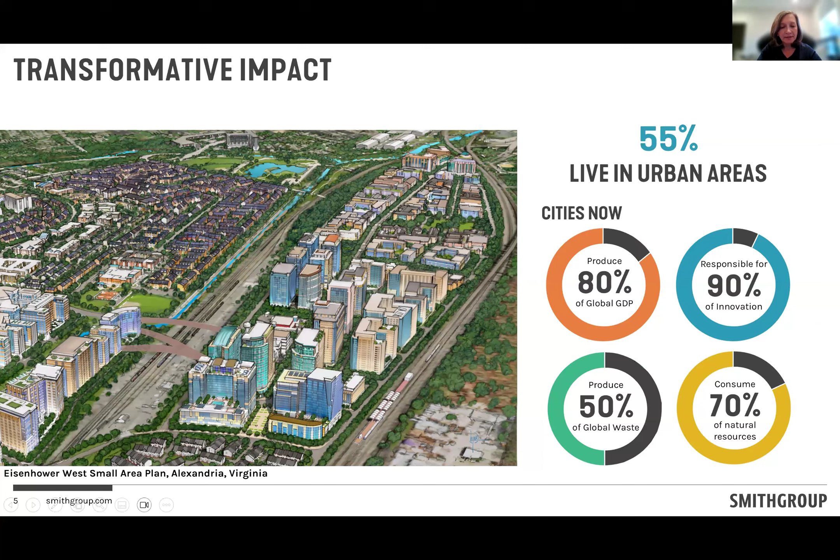And that's where urban design comes in. Urban design's impact can be truly transformative. How we plan and design our cities, our towns, and our spaces matters to our present and to our future. After all, 55% of people now live in urban areas, and our cities are responsible for 80% of the global GDP, but also 50% of the waste, 70% of the natural resources, and 90% of the innovation. And the innovation is key, because that's how we can make changes that address these issues.

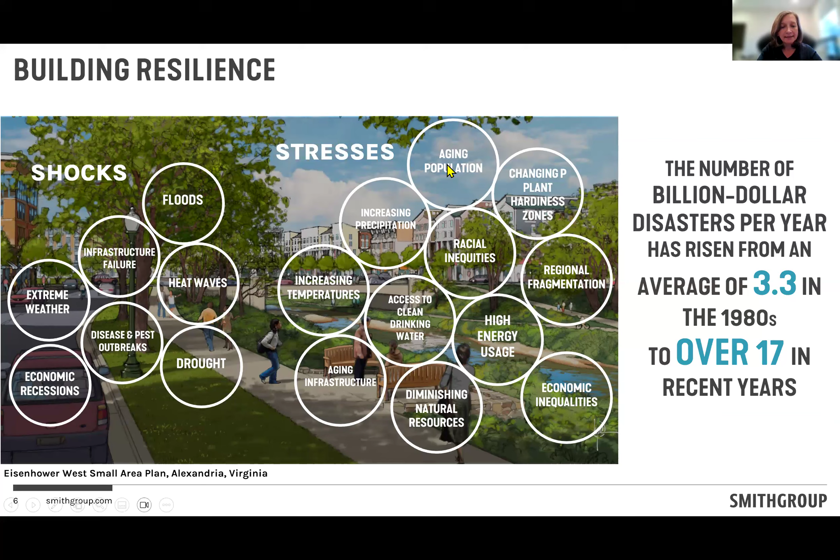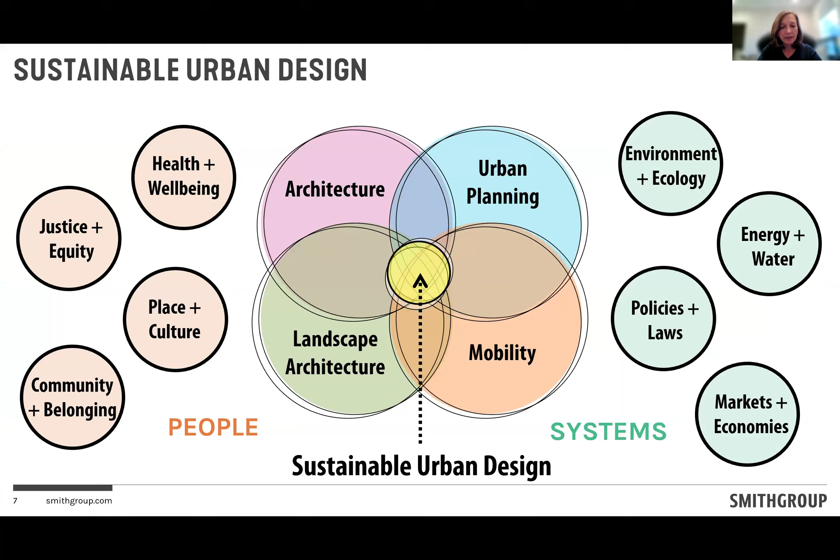At the same time, climate change, government policies, and world events have created shocks and stresses on our people and our systems that are testing our resilience and pushing us to find strategies for adaptation and mitigation. Sustainable urban design lies at this intersection — several disciplines coming together concerned with design of the built environment, and therefore affecting people every single day in every aspect of their lives. But more than that, sustainable urban design can really bring together the beauty and complexity of people with the systems that underlie our communities in a very meaningful way.

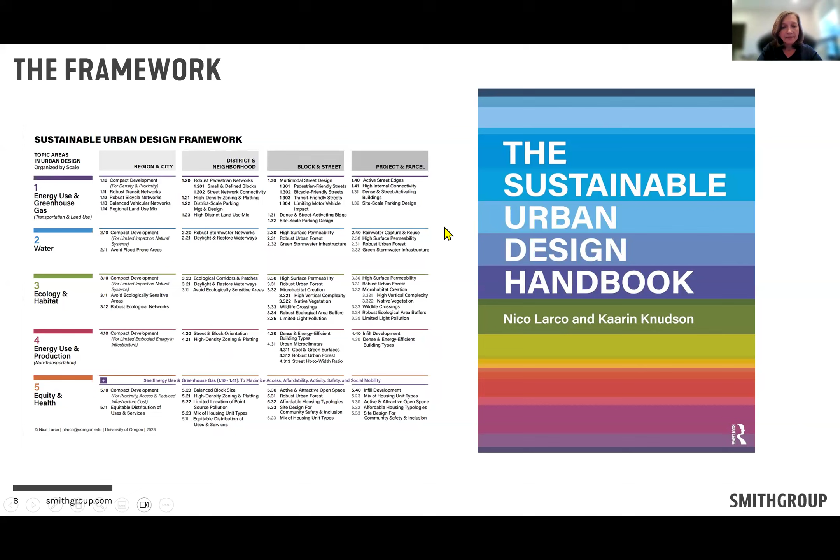The Sustainable Urban Design Handbook brings together critical sustainability topics with design at every scale that we work in. It's an amazing resource that synthesizes research and examples and presents them in a way that is easily accessible and applicable by professionals. So without further ado, I'll introduce Nico Larco.

He's a professor, urban designer, an architect, and he leads Element Urban Design, a design and consulting firm, and has been professor of architecture and urban design at the University of Oregon since 2004, where he's also the director of the Urbanism Next Center and co-director of the Sustainable Cities Institute. Since 2018, he has also been a strategic advisor and researcher at TNO, a Dutch national think tank. Professor Larco researches and teaches sustainable urban design, has developed the framework that you're going to hear about, and assists cities and projects on how to best apply these principles and approaches. His work around Urbanism Next is focused on how technology advances issues such as shared mobility, self-driving cars, e-commerce, and the sharing economy. Professor Larco has published in various academic and professional journals, was a Fulbright Scholar twice, and has testified on his research to Congress, and was also a speaker at TEDx College Park.

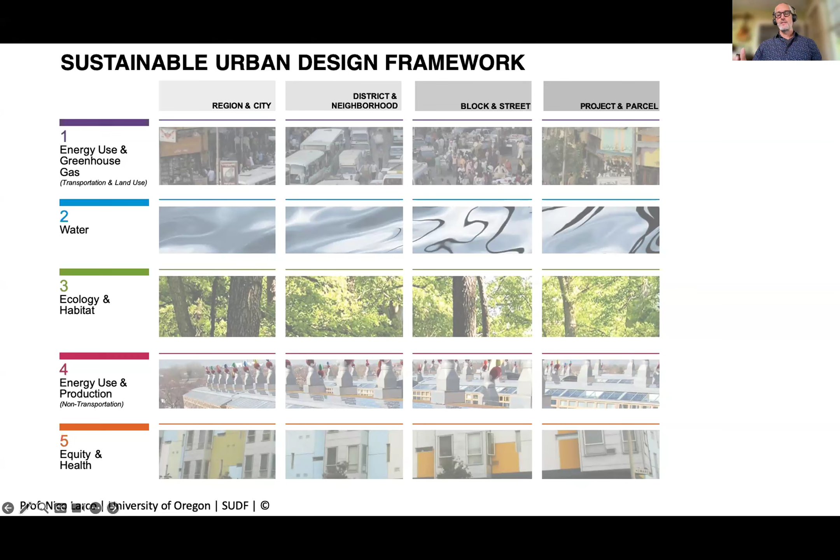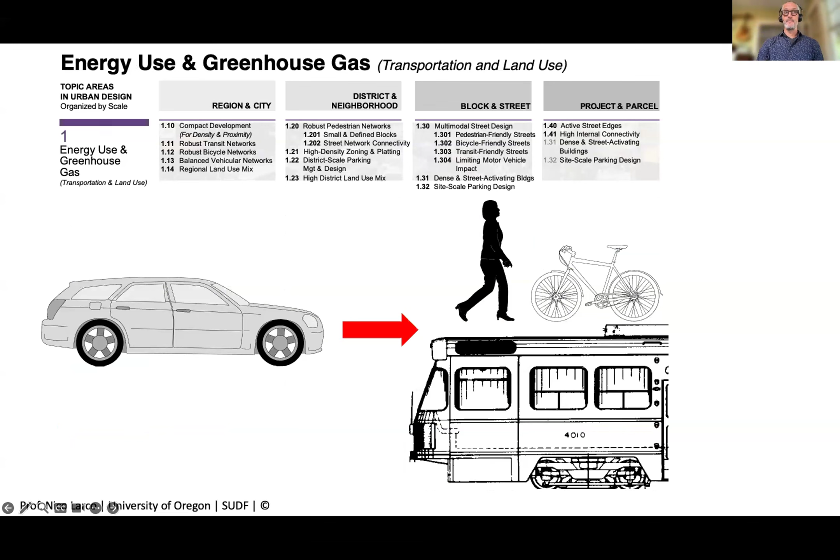So at the largest scale, the region and city scale, the first absolute rule is compact development. And this is important for all the different topics we're going to be talking about. Compact development limits our metropolitan footprint, limits sprawl, lets things be closer to each other, and has a tendency to lead to increased density so there are more opportunities for origins and destinations to be close to each other.

There's lots of different ways of doing that. Here on the lower right, you see the urban growth boundaries that exist around cities in Oregon, but there's lots of different ways to make sure you get compact development: green belts, transfer of development rights, all sorts of things.

We can also think about things at this scale, such as our transit network, the overall network across the entire metropolitan region — not necessarily how a stop is working, but what the opportunities are to get from one place to another. We can ask the same kind of question for the bicycle network, how that works across the entire region — is it possible to get from one area to another as an entire system?

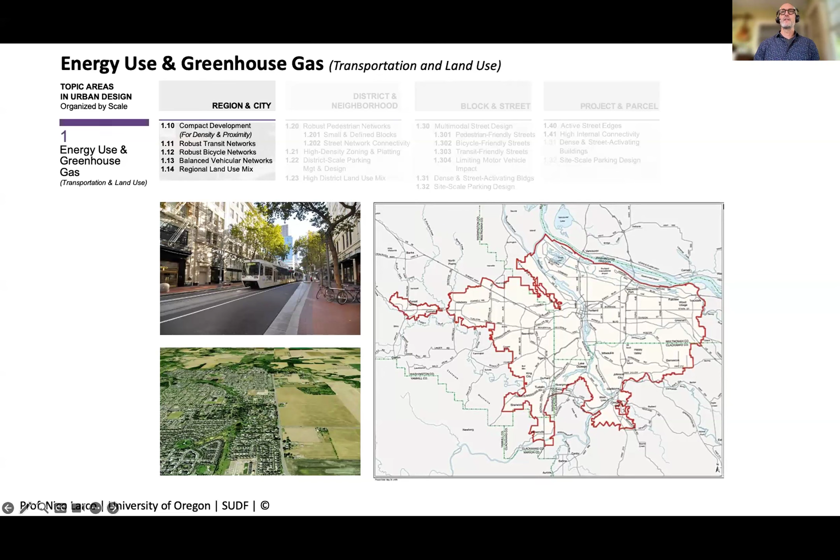And then we can also think about things like the regional land use mix. Do we have all of our housing, for instance, in one area, and all of our commercial in a different area, and all of our industrial in a different area? Or are we having more of a mix of those types of things?

At the district and neighborhood scale, there's a number of things we can look at. On the one hand, simply a question of how are we doing in creating a robust pedestrian network? And a lot of this has to do with street network connectivity. So if we look at this example on the left, this is actually Portland, where I'm from.

This is a 200 by 200 foot block, some of the smallest blocks in the United States. And on the right is a suburban area in the United States. What you see here is these small and defined blocks let us very easily get from one part of the city to another in a fairly easy, straightforward, and straight line manner. It's very clear how to get there, and it's also fairly direct.

In a more suburban area with these loops and lollipops patterns, let's say I lived right here and I wanted to go to this house over here. The straight line distance is not very far at all and absolutely walkable. But what happens is I actually need to go through the street network around here, out to here, potentially onto an arterial, back over, and then down to get to that thing. So that is doubling or tripling the length of the trip, which is why we tell our kids to get in the car and we'll take them there.

So the street connectivity and the way that impacts the travel distance has a big impact on what mode we're going to take. Other things at this scale are, for instance, the density of zoning and platting.

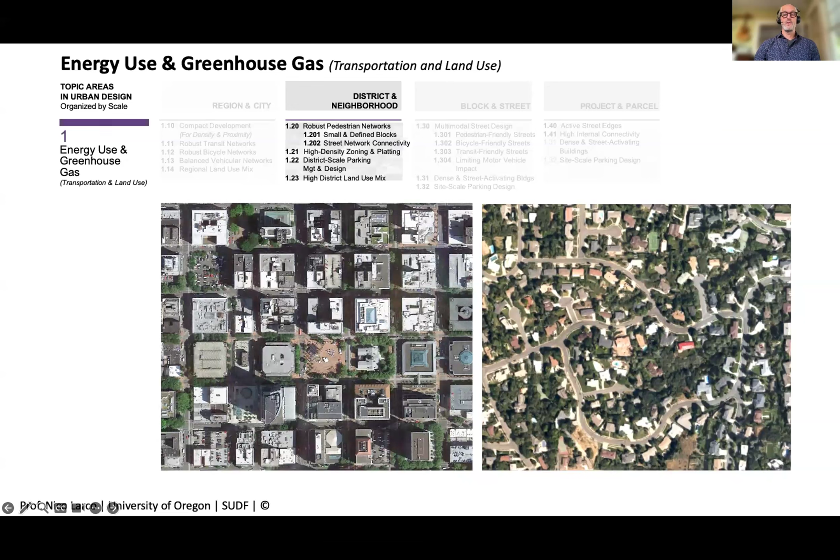At the block and street scale, we're talking about things like complete streets—multimodal street design, streets that don't necessarily exclude the car, but have the car fit within a bunch of different modes that all have a presence and ability to be there and feel comfortable. This is an image from NACTO, and the Urban Street Design Guide is a fantastic resource. We actually worked with NACTO on some of this research earlier on in developing the book. Here you can see fantastic pedestrian areas, bike infrastructure that feels protected and safe, dedicated transit lanes, and vehicles are also allowed, but they're not necessarily allowed to dominate.

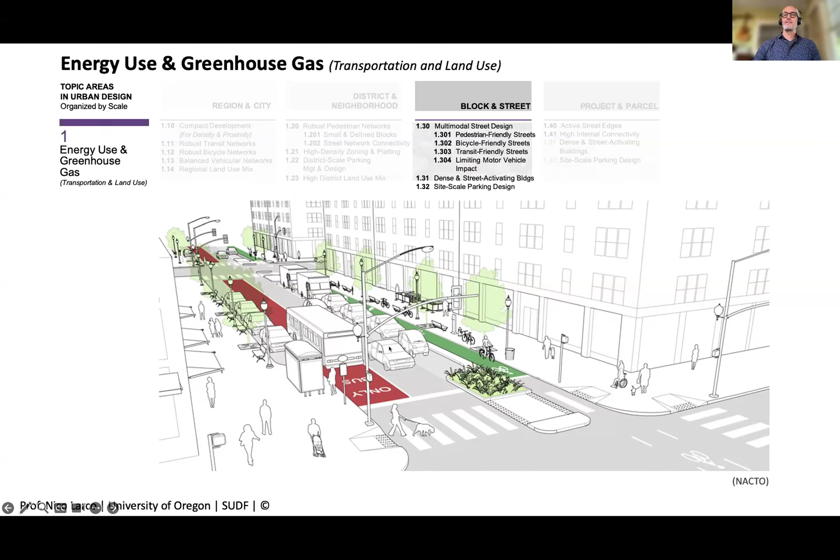Also at this scale, you can think about parking—not only the amount you have, but how you actually design it. At the block and street level, we're really interested in the design of the parking. Questions like: what is the edge condition of the parking? Does it feel like a big gap in the urban fabric? Is the parking located in front of the building or behind it? Is it located on a corner or within the block so you start to feel more continuous street front? What size are the curb cuts?

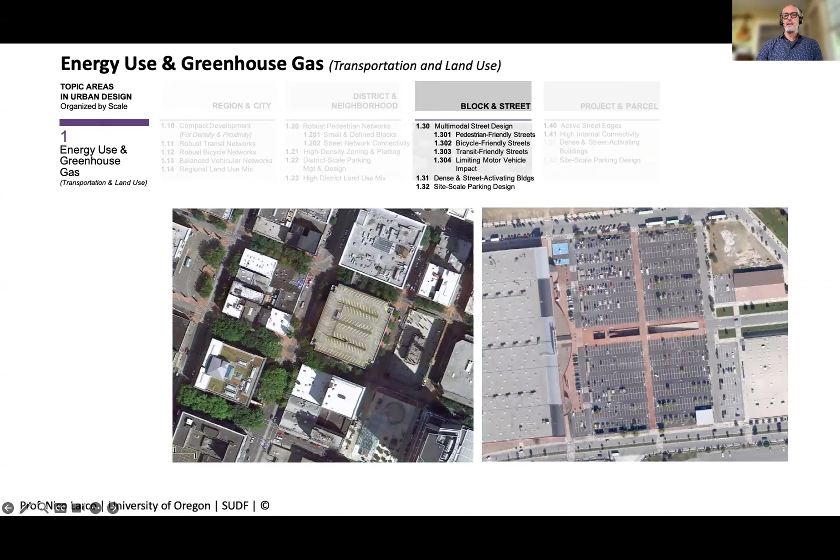Those types of questions. And then at the building scale, we really start to think about how the building is contributing to sustainability of the urban built environment. The image on the left shows high density housing—you see the tower in the back, and the building in the foreground is part of that same project. Instead of having those units all accessed internally through a corridor, which is typically how we do this, each one of these units actually touches the ground and has an entrance and windows looking out. That creates a fantastic, vibrant street front, even when no one is specifically coming in and out of the buildings.

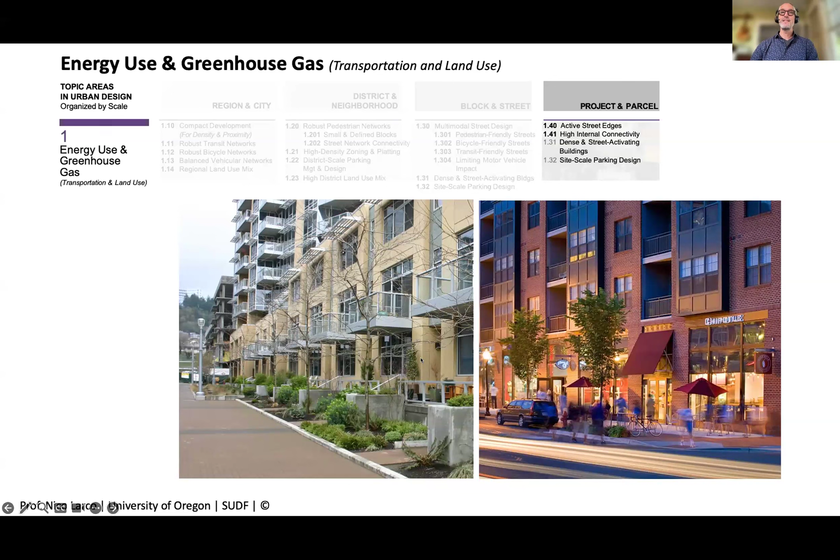This is very much the Jane Jacobs 'eyes on the street' concept, or the perception of eyes on the street. Think about how different that would feel if this was all the backs of buildings with no entrances here.

In a commercial environment you can think of a similar thing: the amount of transparency, the number of windows and doors and entrances, helps create a lively environment. Picture if this was just a continuous solid brick wall with the rest of the urban environment the same, how much that would diminish the desire to come here, walk, bike, and use other modes of transportation.

So that gives you a sense across all these different scales of how that works in energy use and greenhouse gas. I'm going to go a little faster through some of these other topics.

In terms of water and stormwater, there are two main things we want to do: on one hand minimize the amount of runoff we have, and on the other hand mitigate the runoff.

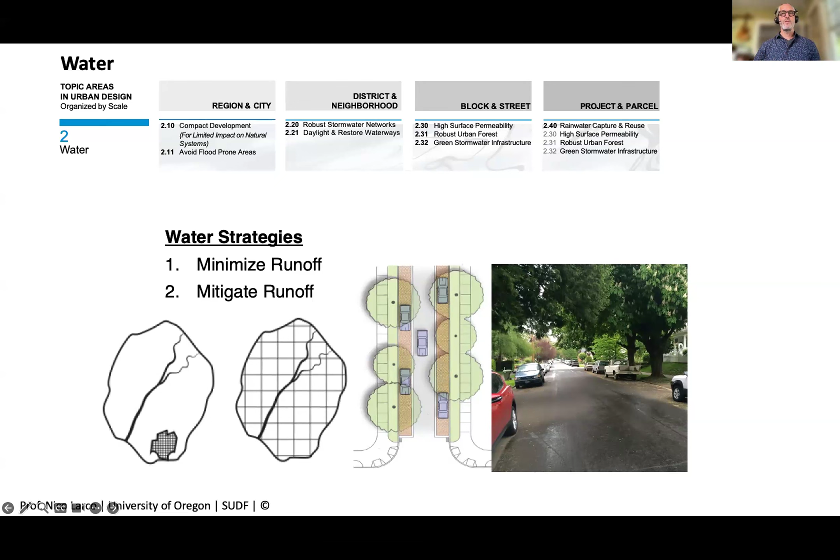That's all about minimizing runoff. We can also substantially mitigate runoff through urban design—things like retention ponds, detention ponds, rain gardens, and swales all help slow water down, cool it off as it moves through, provide opportunities to filter it, and help it find its way back into the ground. Instead of piping everything directly into a river, this reduces how much water gets there while slowing it down, cooling it, and filtering it along the way. Trees, again at the block, street, and project parcel scale, play an important role by providing evapotranspiration.

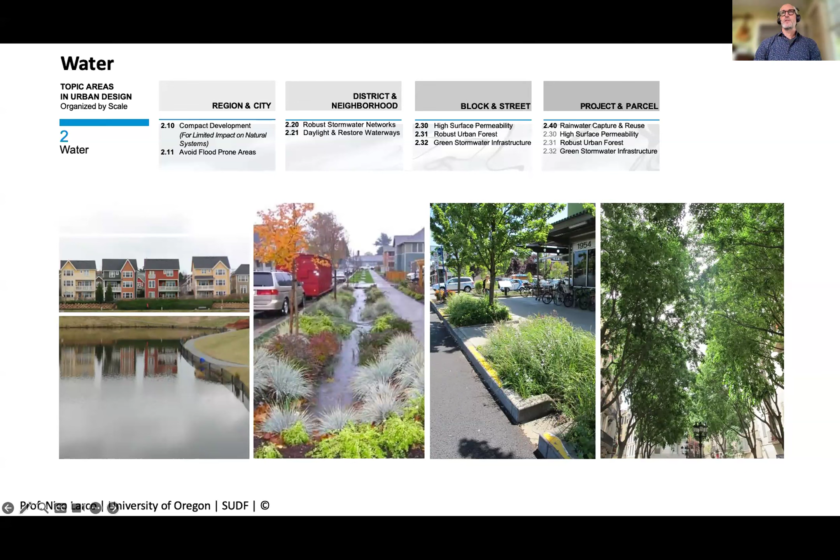So they're pulling water out of the roots, up into the leaves, and coming out of the canopy, evaporating back into the atmosphere, letting the ground take on more water. So here you can see at all these different scales how you're creating these robust stormwater networks and green stormwater infrastructure that helps to mitigate stormwater.

In terms of ecology and habitat, the main things you want to do, as I mentioned before, is don't touch things you shouldn't touch, which we decide as urban designers and planners, saying what areas are open to development and what aren't. Mitigate where we do touch them, figuring out how we buffer, which I'll talk about in a moment, and how we create microhabitats.

And it also mitigates if there's ever a problem in one place, species can actually move from one place to another. So at the region, city, district and neighborhood scale, we're talking about these robust ecological networks and these ecological corridors and patches.

As we get more to the block and street scale with those issues, you can think about how it is that we actually cross some of the infrastructure with these networks and corridors.

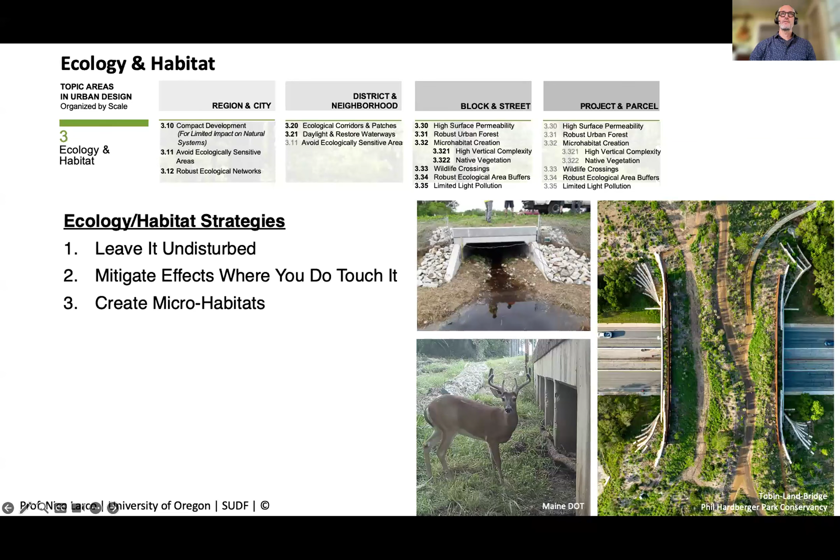So thinking about at the block and street scale, how you deal with your wildlife crossings so that you have continuous networks. These continuous networks can have all sorts of different shapes. You can have your core habitat and edge habitat, you can have stepping stone corridors, you can have landscape corridors, all sorts of opportunities for those things, depending on what you're trying to do.

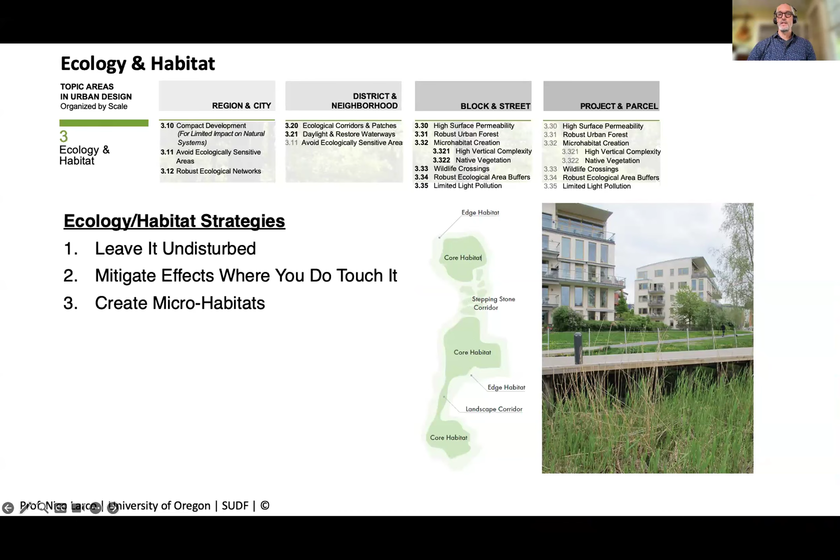And you need to be working with ecologists to figure out exactly what's best for your target species. But then at the block and street scale, we can really think about where we do have development, how we make sure that that is not creating a problem for neighboring habitat, thinking about ecological area buffers and making sure that they are sufficiently large for whatever target species we've got.

So this is a slide that shows target species on the left-hand side and the length, the size of the buffer that you should have. And that would change depending on, for instance, if you're downslope from a more aggressive use, or if there's a lot of water moving between these spaces or things like that.

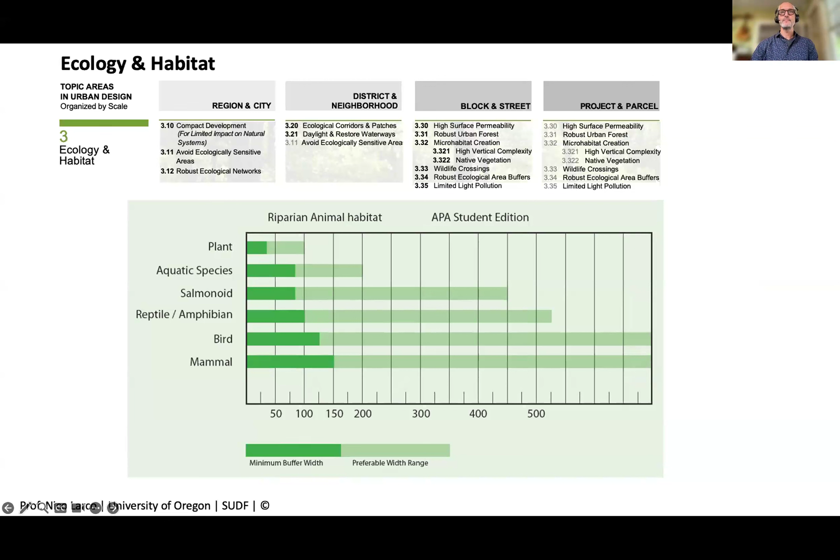Another really important topic at the block and street scale is this idea of high vertical complexity. This came from interviewing and having fantastic conversations with urban ecologists who said one of the best things that urban designers and planners can do is to create more complex, more robust vertical complexity.

And what that means is, what we often do on the right-hand side is things like this, which is these carpets of lawn, a monoculture, a few lollipop trees that are also all the same species. And while that makes sense in areas where you might be kicking a ball or throwing a frisbee, we do this a lot. And even at the edges of places where we might be kicking a ball, there's opportunities to be doing something different.

What creates a robust habitat is the things that you see on the left-hand side. This is a rainforest here in the Pacific Northwest, but it really shows this idea of a range of different types of structures. You have canopy trees, smaller trees, bushes, shrubs, sedges, ground cover, all creating this really complicated vertical structure that creates a range of different types of habitat that help the same species in different points of its life cycle.

If it's mating, if it's nesting, if it's hunting, or different species, this really creates a much more robust kind of moment.

Well, we can't exactly recreate the Pacific Northwest rainforest everywhere, but there are many things we can do to increase vertical complexity. This is an example of a parking lot where water, instead of going into a pipe, goes into a swale. A fantastic kind of move. And then instead of just lining that swale with grass...

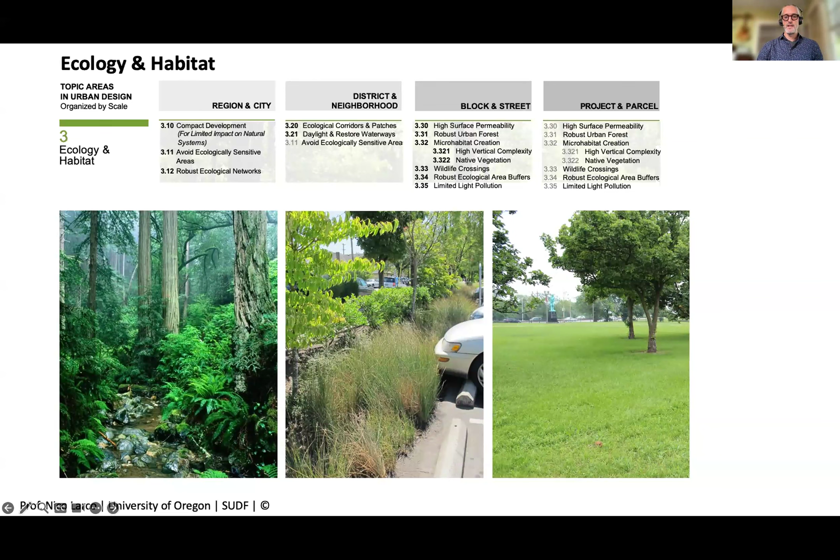You can also create microhabitat. This is an example of a park which has grasslands, wetlands, and oak savanna all in one place. That's a lot of different habitats happening in one spot, but there are opportunities within urban areas to really focus on creating viable habitat within the area.

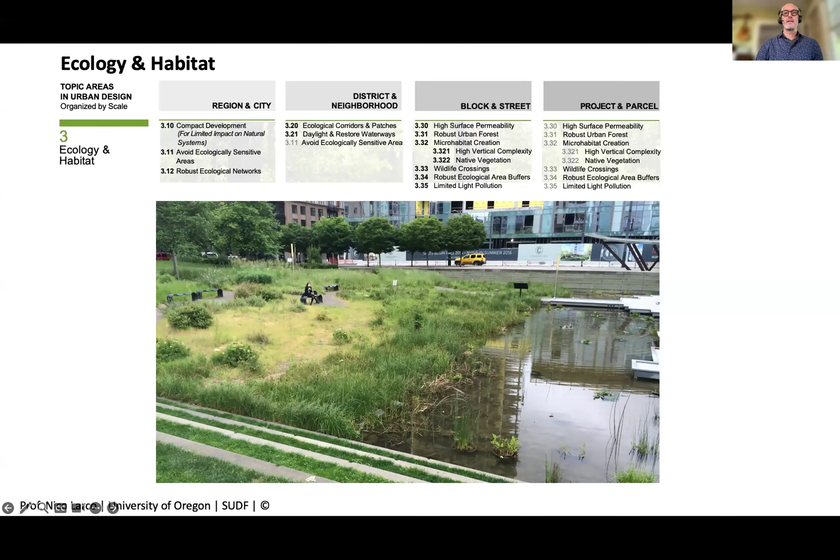In terms of energy use and production, we're trying to do a couple different things. One depends a lot on the climate. With the book we've done, we've organized it into 4 main categories: arid, tropical, temperate, and subarctic. Most of the United States is within the temperate zone, with some tropical and arid.

What we're trying to do here is think about how we reduce the urban heat island effect, and how we maximize the sustainability potential of buildings based on orientation, block size, and such.

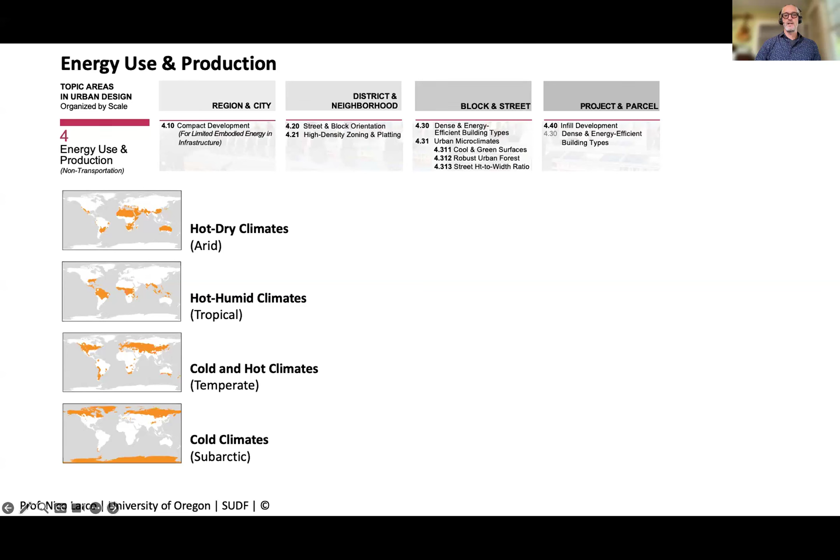So, for instance, you can think about how different housing or building typologies perform better or worse depending on the climate. This helps us understand, depending on the climate we have, what kinds of typologies we might need for sustainability, which would then affect what kind of density of zoning and platting, what size of lots we're going to need to make this work.

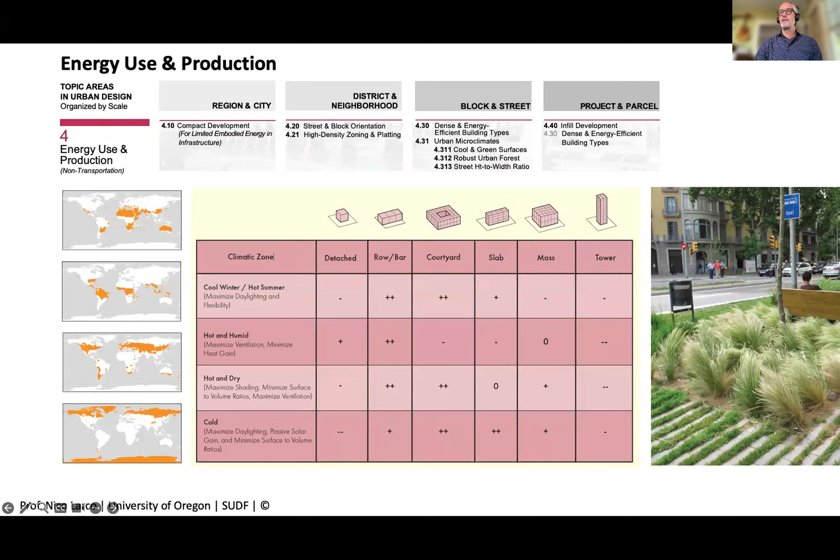We can also think about things at the block and street scale, like the color of surfaces, creating cool and green surfaces. This is often thought of as the albedo effect. Darker colored elements end up taking on more heat, absorbing more heat. So how can we green an area or use lighter colored materials? This is a really good example from Barcelona, one of the Ramblas over there.

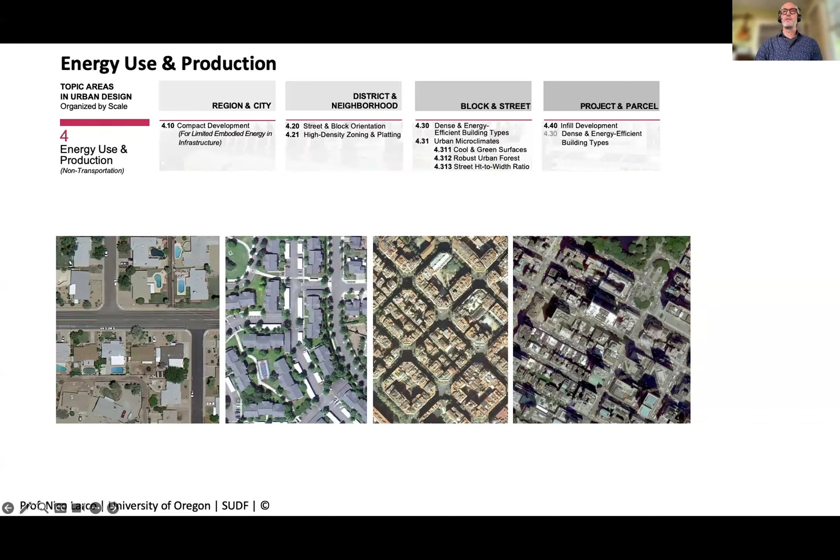You think about the amount of embodied energy, the energy it took to produce, maintain, and then dispose of the concrete and materials used for the street, for sewage, for water delivery, for electrical lines, and how much public infrastructure you need per building. That definitely has a cost to it, but it also has an energy side as well. So the denser the development, the more opportunity we have to reduce the overall embodied energy of development.

And then finally, in terms of equity and health, we can think of a number of different ways that the built environment really impacts the opportunities for equity and health.

Affordability: everything we talked about in that first section on transportation and land use, and for energy use—getting people out of cars and into bike, pedestrian, and transit use—is fantastic for energy, but it's also fantastic for equity reasons. It turns out that bikes, pedestrian access, and transit use are the most affordable and equitable ways of moving, so it definitely helps a ton with affordability.

We can also think about how to help with affordability through the types of lots we have, the size of lots, the type of development we're allowing, and also the mix of housing unit types that we have.

There's been a number of studies that have shown that areas with a larger mix of housing unit types actually reduce the cost of housing.

Accessibility, as I mentioned, covers all the topics with transportation. In terms of physical activity, we can think about what modes the built environment is pushing us towards, and are we actually using active travel? Are we moving our bodies as we move ourselves through the city? Thinking about bikes and pedestrians, and most transit trips start and end with walking and biking.

We can also think about the other piece, which is movement that has to do with recreation. What kind of open spaces are available to us? A lot of studies have shown that one of the biggest determinants of whether you'll exercise today is whether there's a spot near you to do that exercise. Is it really accessible and is it welcoming?

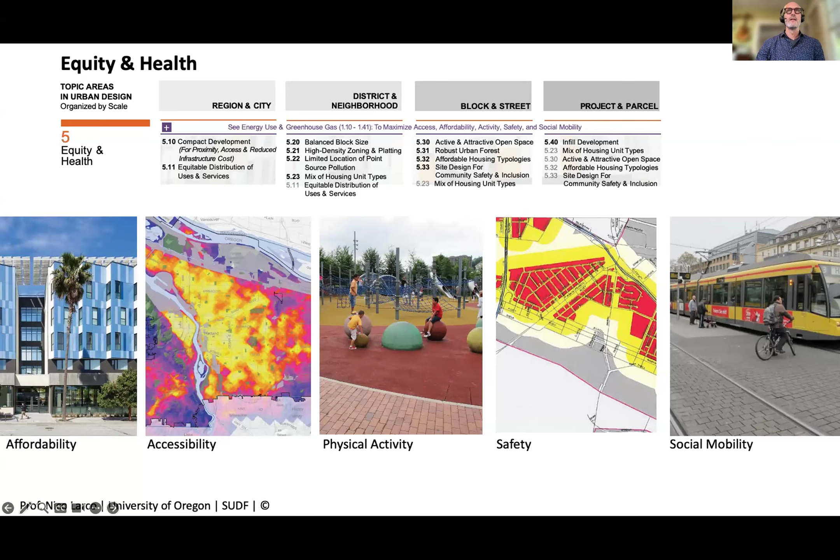So that was a lot of information to give you all at once—apologies. But the idea is that hopefully I'm showing you how you can break this down into pieces that make sense and are understandable.

As I mentioned before, the way you can use this is: if you have an outcome goal, you can think about all the different physical things, some of what I just talked about, that relate to that goal. This is tremendously effective when working with community stakeholders, who are usually very clear about the outcome they'd like to have, but aren't really sure how to create that in the built environment.

As Meryl was talking about earlier, this question of how do we do it—we know what we want to get to, how do we do it? Well, this helps you understand that.

You can also think about the topics that exist at a specific scale—what questions should we be asking? If I've got a project at the block and street scale, or at the district or neighborhood scale, these are all the questions I need to ask and figure out how they might apply. You can also use this to think about synergies or co-benefits.

Understanding the relationships between these is, I think, an area with huge room for improvement in how we do our work around this topic.

For instance, here's an example I like to give: if we were thinking about street trees, typically in urban design and planning we just copy whatever was done in another part of the city, or a nearby city, with the same spacing and the same type of tree—say, 20 to 30 feet on center. We can use this framework to actually make more informed and better decisions about that.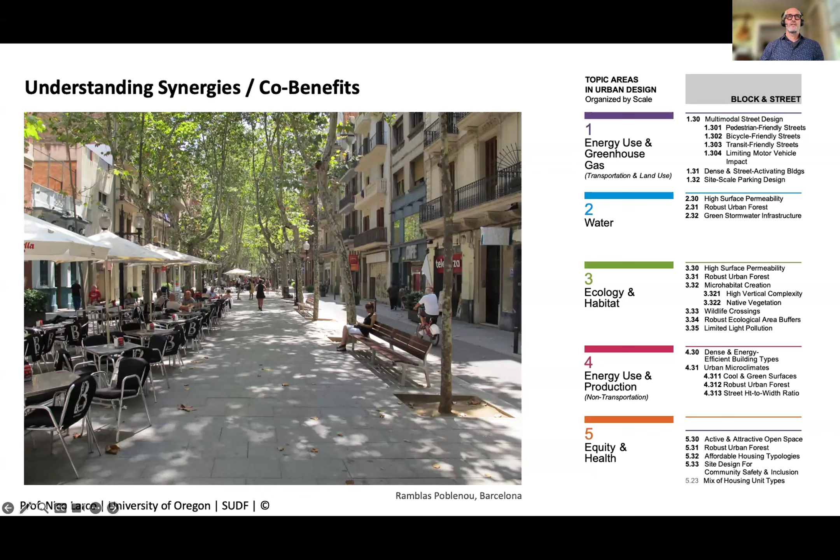So this is a way that we can think about using this framework to understand synergies and co-benefits. We can also use it to understand trade-offs.

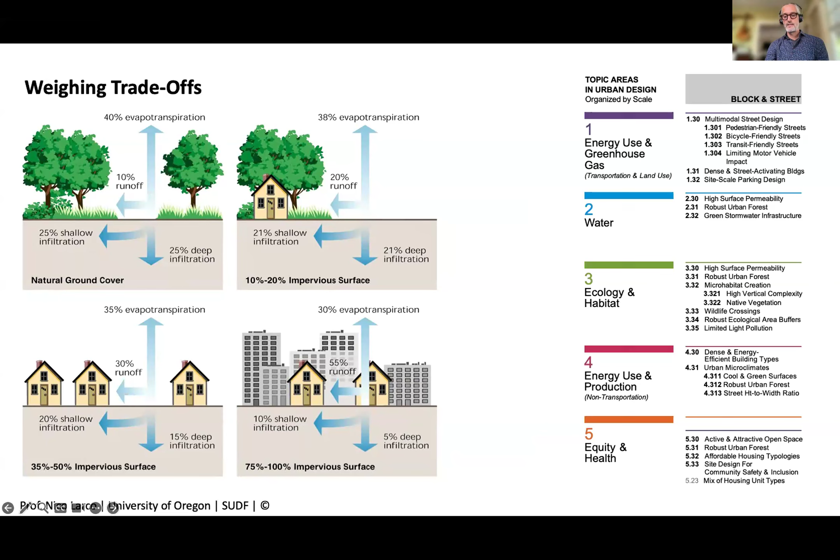So for instance, this piece I showed you before — if we were just thinking about stormwater, maybe you'd think this would be fantastic, and this would be horrible. But for transportation and land use, and for equity issues, this works a whole lot better. So you can use this to at least make evident where the trade-offs are going to be, and think about how you might mitigate conflicts you're creating.

In terms of how to use this framework, there's a bunch of different ways to use this. On the one hand, as I've mentioned, it's simply a design tool — early on with your design teams and consultants, it helps you focus on what questions you need to be asking, opportunities for synergies, and also understanding what the conflicts are.

You might not be able to address everything covered in this, but at least you can ask the question and figure out where the easy wins are, and where you might need to put either money or political will to make it happen.

You can do an existing conditions evaluation and assessment, and also look at alternatives to see the potential of an area. So you've got a new project happening in an area — the first thing you can do is go through the framework, and for each element, ask: is this already working well? Is this something we could get to work well? Or is this something that's going to be a real challenge to make happen? That gives you an understanding of the landscape — these are the areas we could make work, and these are the areas that are going to be more challenging.

It can help you think about what your priorities are and where you might have the most effect. It can also help you understand what partnerships you might need to develop to actually get projects to work, and maybe partners outside the scale you're working at, or different sources of funding.

In terms of client and stakeholder engagement, as I mentioned before, it helps you define where the priorities are, and translate that into actual physical design elements that you need to have happen. And then also, you can think about your design team composition — I would say your project composition.

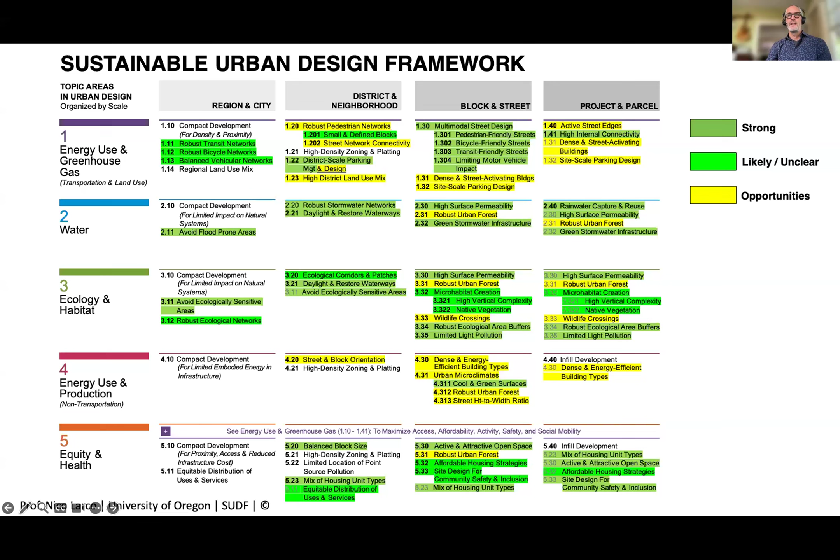So we did an evaluation looking at the existing conditions of this area—what's working and what's not if we want to make this area more sustainable. If we ask the question, how do we make this sustainable, we did an analysis looking at different topics and how much things were working well, where things were kind of not great, and where things were really going to be challenges. You can look at this at different scales, and it helps you understand where there are opportunities and where there might be real challenges, and how you might approach this.

So that's work that we developed over many years. Over the last 10 years, we've been developing this, which is the Sustainable Urban Design Handbook that was mentioned by both Carla and Meryl. It has been a long time coming—if I knew how long this would take, I probably wouldn't have taken it on, but I'm thrilled that it's out in the world right now.

The Sustainable Urban Design Handbook is organized around the framework, and each one of the elements in the framework is its own chapter. I'm going to show you basically how the chapter is organized.

Each element has a chapter, and the chapters have, on one hand, what we call the dashboard page, which describes what the topic is—for those who might not know what a robust ecological area buffer is—along with some of the related metrics. There's also an area that talks about how this element is influenced by other elements and how it influences other elements, giving you a sentence or two to help describe why those things are related, so you understand how things connect across all these different topics.

There's also a very rough implementation guide to say, if this is a greenfield development versus a retrofit development, how easy or hard is this in terms of cost, and how easy or hard is it in terms of difficulty—which is a bit of a question of political will.

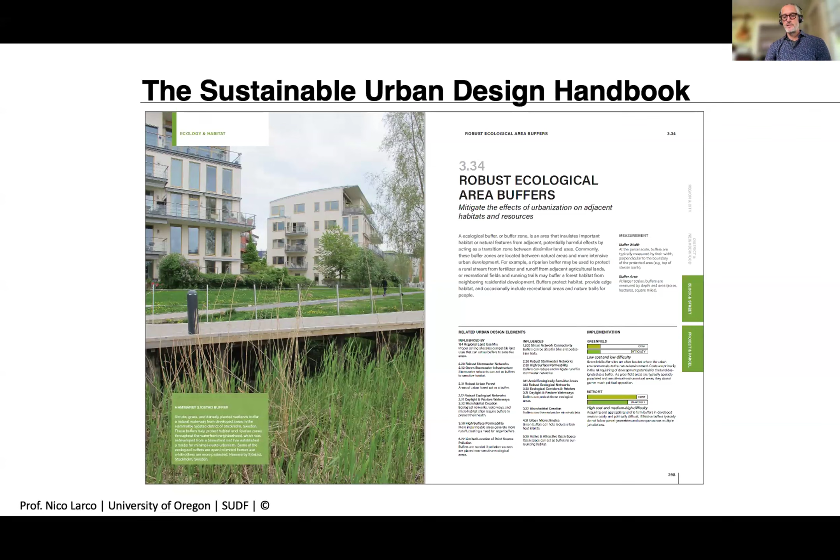Then each one of these elements also has a section on the recommended approach—this is what we're pointing to, this is the vision we're trying to get to. A typical approach shows what we usually build, which is often not quite at the level we'd like it to be, so we can understand where the differences are. Then there's the importance section, where we have a lot of peer-reviewed research and professional best practices we've researched to explain why you should be paying attention to this and what impacts you're going to have.

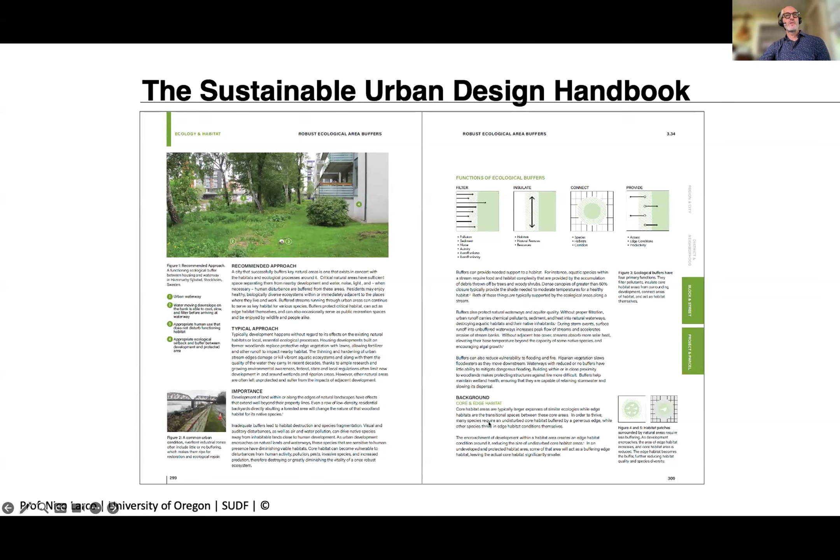Each element also has a section on background. So if you don't know the difference between a core and edge habitat, we explain it there—for instance, impacts between buffer width, shape, and plantings, and how that can affect the buffer. Then we have a section on considerations and caveats, which talks about element interactions and brings nuance to your understanding of how this element works, along with some political issues you'd probably need to keep in mind as you work on this topic.

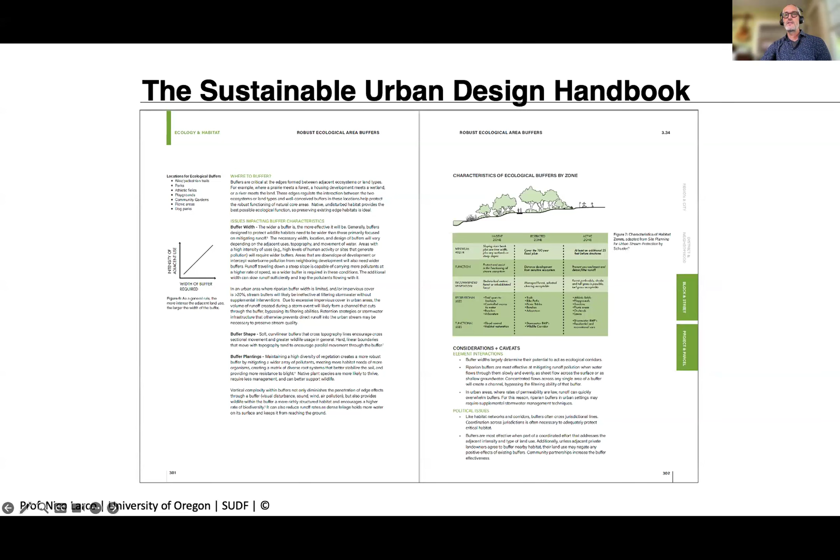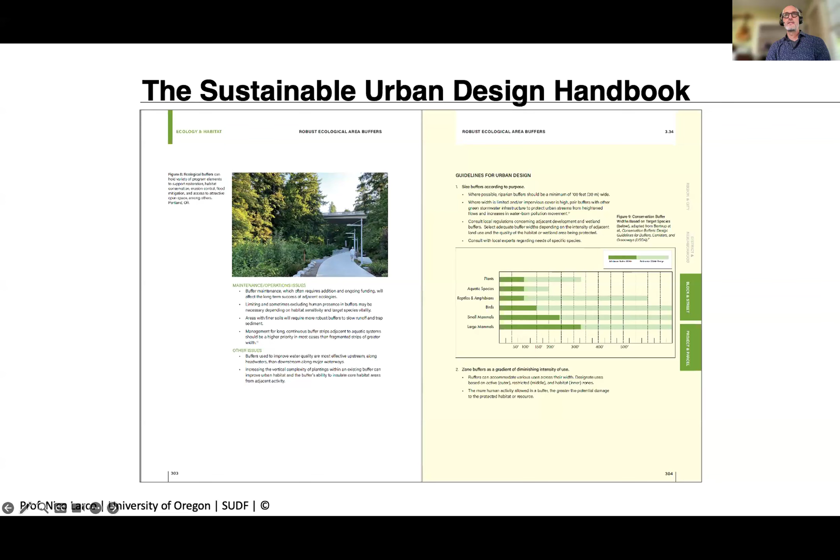Maintenance and operation issues you might have to consider as you work on this topic, and then some other issues. And then finally, we get to the guidelines for urban design. The idea here was to synthesize a whole lot of research to say here's some basic rules of thumb you can follow to make sure you make good decisions that you're not going to feel like you shot yourself in the foot with later on as you continue to develop a project. So for instance, the size of buffers you might need, and how those buffers might change depending on topography and landscape, and how you might use vegetation for it. So those types of things.

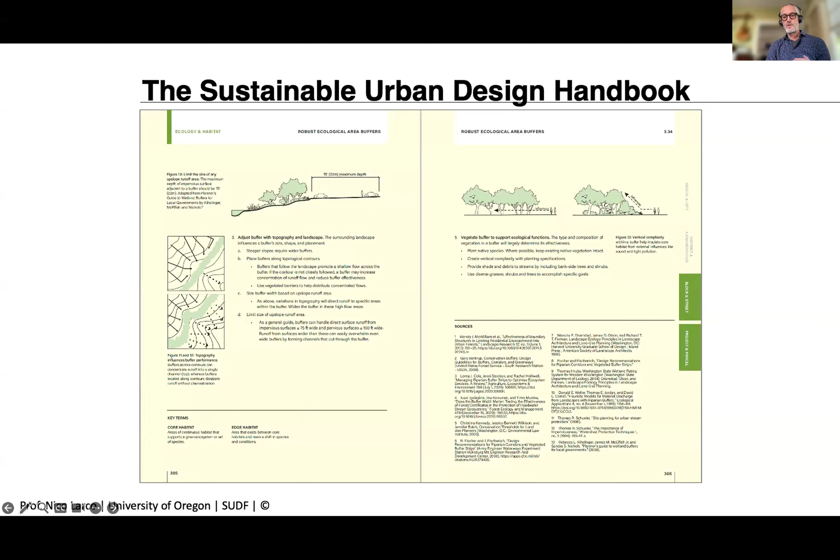So each element in the framework has its own chapter on this. A lot of people to thank in making this happen. Kaarin Knudson, who's actually now the mayor-elect in the city of Eugene, is a co-author with me. And then a bunch of professors, professionals, and students who helped make this happen. So tremendous, standing on the shoulders of giants, not only from the literature we looked at, but really individuals who really helped us put this all together.

So this is the book, in case that's of interest. I hope it can be helpful to you all in the work that you're doing. We found that it's both for design teams and planners, but also elected officials or community stakeholders. It really gives them a way of helping understand how these topics they're interested in can work together and how it's translated into actual projects.

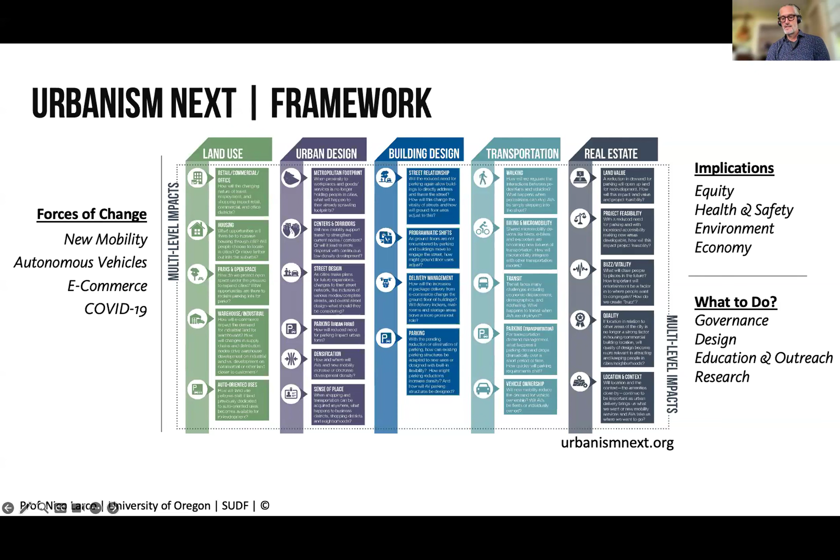Really briefly, I'll also mention, as was mentioned before, I run the Urbanism Next Center. Urbanism Next looks at the impacts of emerging technology on cities. So we look at things like how new mobility or shared mobility, self-driving cars, e-commerce, how those things are impacting cities, and how those things have impacts on equity, health, the environment, and the economy. I just mentioned that in case people are interested in those topics. Love to hear from you, we've got a lot of research we've done in that area. Online at urbanismnext.org, we have a section called The Nexus, which compiles a lot of research on these topics to help you understand that.

So with that, I'll just say I'm hopeful that this is helpful. As I mentioned, many of us are really interested in figuring out how we can create more sustainable communities. It often feels overwhelming, there's just a ton of different topics. It's hard to understand how to relate them, hard to know what questions to ask, and hard for community stakeholders to understand how to engage in this and know where their issues fit into all of this. So the hope is that the Sustainable Urban Design Framework is a tool that can help you decipher that, simplify it, and understand that it is actionable, that we can take a rational approach to it and chip away at this. With that, I'll be happy to take any questions you might have. Thanks so much.